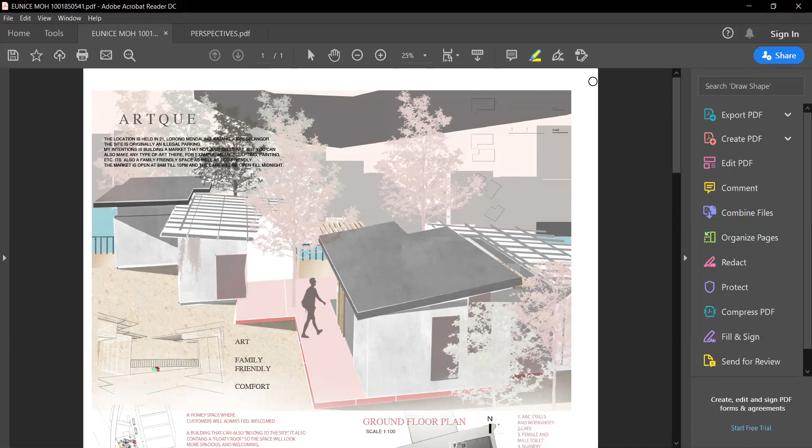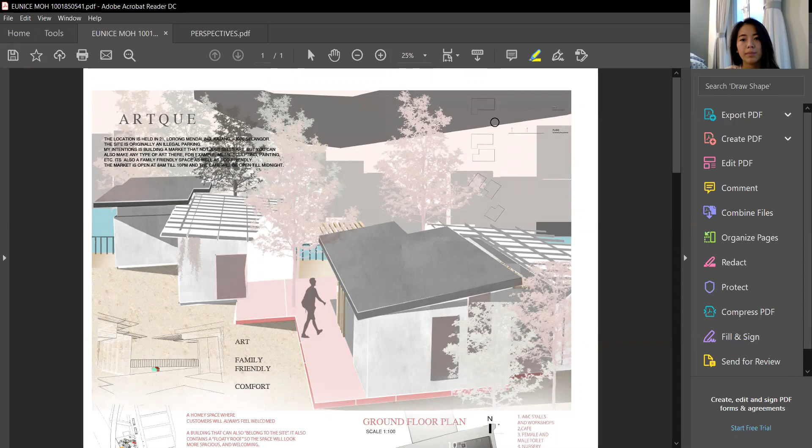This is my building. The reason why it's designed this way is because, based on my concept, I want it to look a little homey, so the building will actually belong to the site and people will actually be comfortable going to the market.

This is my floor plan. It's oriented this way because when people arrive at the drop-off area here, the entrance is already there for them over here.

People can also immediately see the view straight here.

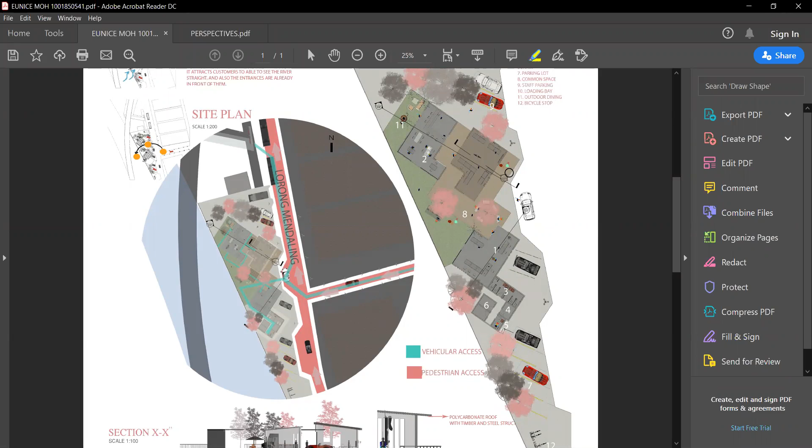Since my building will be a family-friendly space and also eco-friendly, my materials for the eco-friendly part are like timber and also precast concrete, and it uses a polycarbonate roof to provide natural lighting to the market during the day.

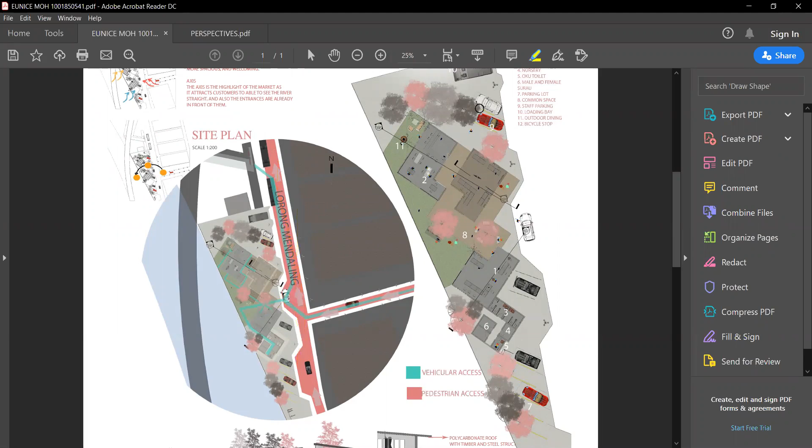The pink lines are actually pedestrian access and the green line is actually vehicular access. My design principle is axis, because of this straight path here, where people can just go straight and see the view.

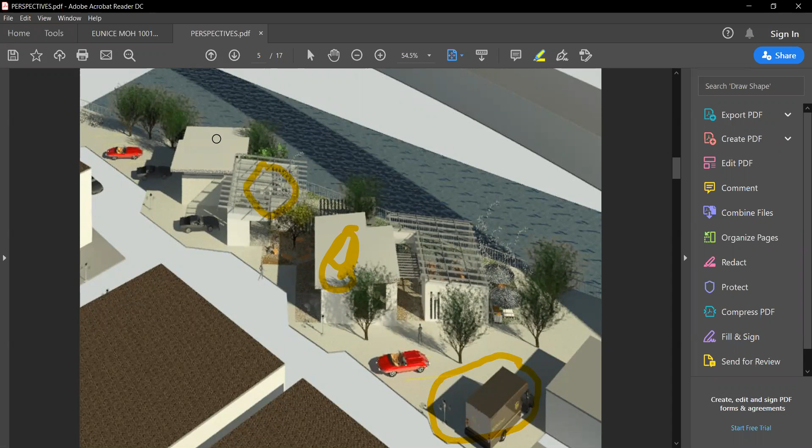These are my spaces. Over here is the loading bay, and this building here and this building will be the stalls. Over here is the toilet area, and here is the cafe area.

This is how the outdoor dining area looks like from the cafe. This is the common space, where people can just chill here and look at the view out here, and over here is the path to the toilet.

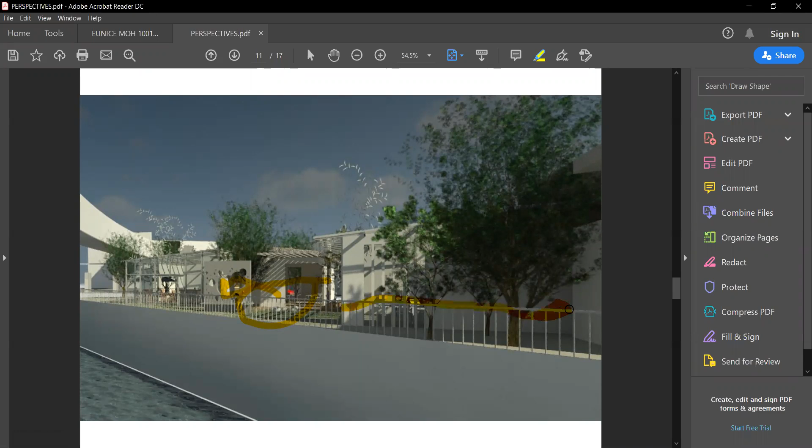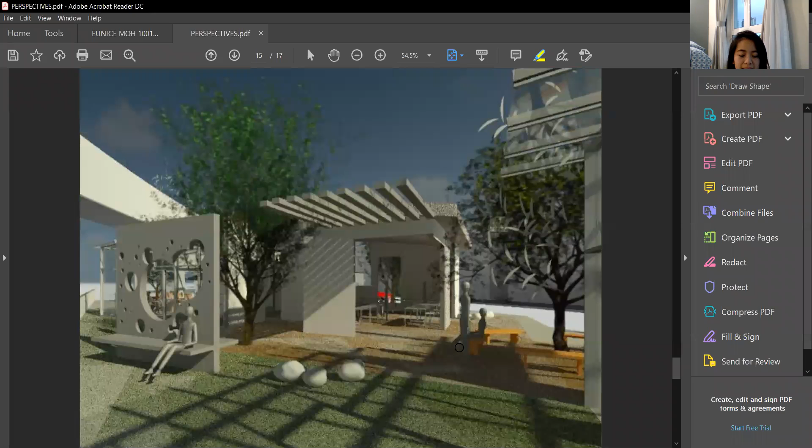These are my interior perspectives. This is my art and craft stalls, where people and also workshops are combined together, so they can buy, and if they want to learn, they can just learn. This is the common area, this is the way to the toilet, and this is the cafe area.